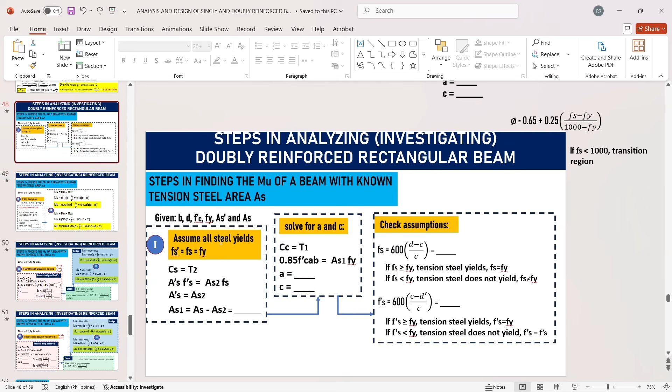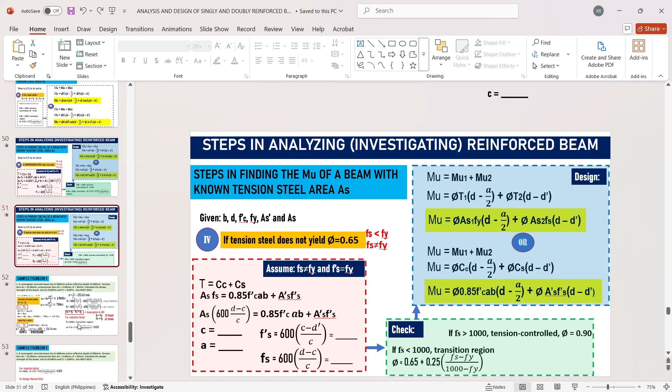Sample number 1. We have a beam with width 400, effective depth 600, tension bars AS with 10-28mm bars. Note the given tension and compression bars. Disclaimer: assume tension is at the bottom, positive moment. D prime is 60, measured from compression fiber down to the centroid of AS prime. Calculate the design strength of the beam using fy=415 and f'c=21 megapascal.

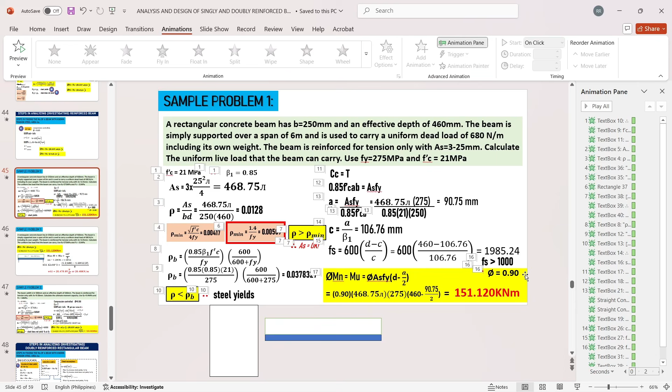So we have this. F prime S is 600 times (C minus D prime) over C. It took me a while to send this because I had to type everything individually. So let's discuss faster. D prime is 60, so we get F prime S equals 457.5.

Next, if we check: Fs is more than Fy, and F prime S is also more than Fy. We're glad our assumption is correct, so we stick with the A and C values we obtained. We don't need to solve for a new C or A. Therefore, I can now proceed to design my MU since all bars are yielding.

For the reduction factor, we get the reduction based on our FS. Even though it yields in tension, it's less than 1,000, so we are in the transition region. That's how it works. Then we substitute the values.

FS, the actual FS is 824. So ito na yung sinasabi ko sa inyo na pag nag-analyze tayo, hindi na 800. Hindi na siya maximum range eh. So, mababago na. So we have 0.825 final reduction.

So if we use that to our design moment, yan, ito yung formula ng design moment, the summation of mu1 plus mu2. So ilagay mo lang yung moment equation ng mu1 and 2. Depende sa'yo kung anong gusto mo, kung tension moment ba o compression moment. Balikan nyo lang yung diagram, no? But this time, ang gagamitin ko muna ay yung tension moment. Okay? So, T1 tsaka T2.

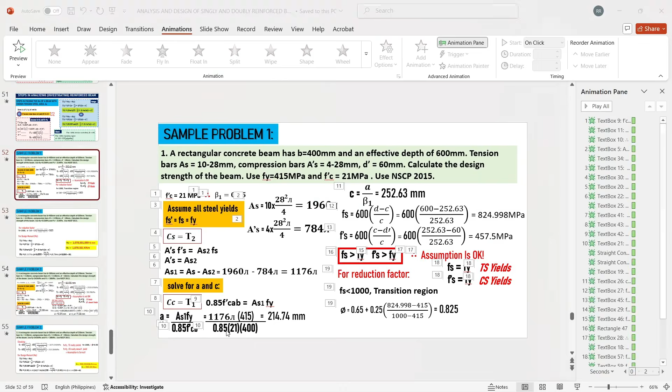May reduction. Tandaan, may reduction. Kasi MU na yan. So, substitute. T1 is AS1FY. Why? Because FS sana yan, kaso FY na nga, kasi nga nag-ano na siya, nag-yield na siya. Tapos 'di ba AS2, sorry for this, meron tong mali. Hindi to F prime S kundi FS kasi T2 yan eh, hindi siya CS, no? Okay, so balik natin. Yan, FS. Pero FY na rin yan kasi nga FS is equal to FY na. Okay? So yun lang, itutukan nyo mabuti yung mga FS natin, ha? Yan, FY na rin to.

Ganun lang yan. Yan. So, kaya pansin nyo, sinubstitute ko na lang yung AS1. Yan, yung nakuha natin kanina. Tapos yung reduction natin no, is 0.825. Tingnan nyo na lang yung pagkakasap. Yan, therefore, we have 1078, 501.089 Newton millimeter, or in kilonewton meter is 1078.501. That's example number 1 for yielding, lahat nag-yield. Parang gano'n. So, anticipate natin yung isa.

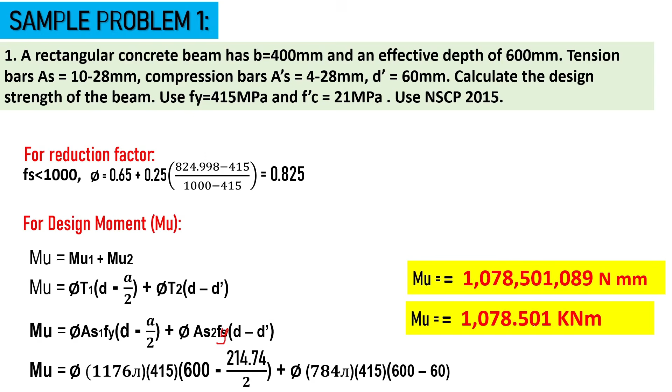Yung problem number 2, malamang may hindi na nag-yield dito. So, binago ko na yung given like yung B is 300, effective depth is 350. So, medyo kwadrado, no? So, tension bars 428, compression bars is 228. Yan, binago na rin yung F prime C. So, okay to. So, next, let's start with the beta 1 again.

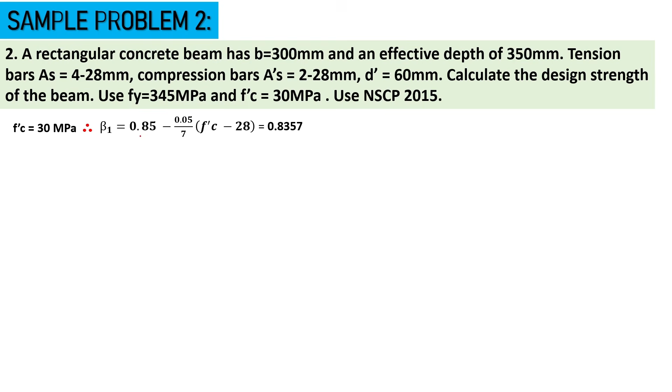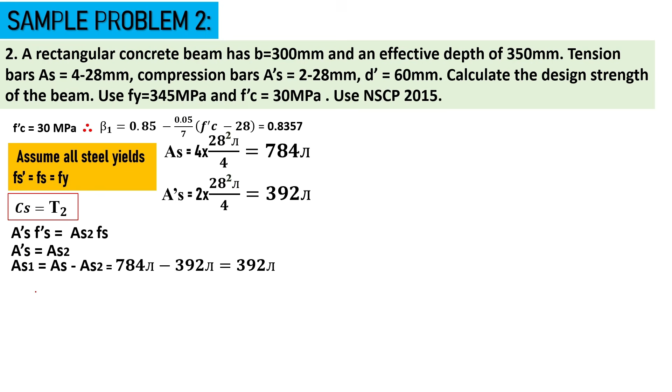Okay, kuha tayo ng bagong beta 1 kasi more than 28 yung F prime C. Then, kuha tayo ng area as usual. Yan, then assume all steel yields, para makakuha tayo ng AS1 at magamit tayo ng AS1 sa pagkuha ng A and C. Ganun lang. So, 392 yung AS1, 392 pi. So, to solve for A, CC and T1 again will equate, and then substitute. We have 55.538 mm. Napakaliit yan.

Okay? So, parang sinasadya na maging ano to, compression steel yield. Does not yield. Okay? So, 0.85, 30 and 300. Okay? And then C. Okay? 66.456. Okay? So, parang pinakargang mabuti doon sa compression bars. Okay? Kaya hindi masyado malaki yung ano mo, yung depth of compression block.

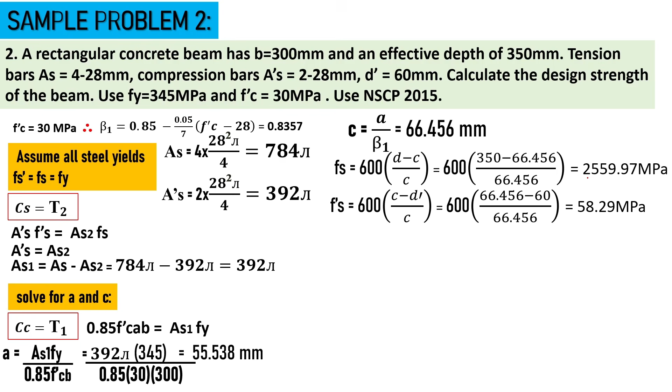Di ba? Maliit eh. So, finally, we have FS to be checked, no? And substitute D, 350, substitute C. Okay? And we have 2,559, a very large number for steel, tension steel. So, this is yielding, more than 1,000 din siya. Tapos, yung F prime S mo, kinawawa. 58.29. Therefore, less than FY. No? So, our FS is okay.

Good assumption. So, nag-yield. Pero yung F prime S hindi nag-yield. Less than siya. So, assumption is not correct. Therefore, you need to get the new A and C. Ganun yun. So, dahil hindi nag-yield si compression, equal lang siya sa sarili niya. So, ang sarili niya ay yung 600 C minus D prime over C. Pero hahanapin niyo po yung bagong C, yung actual C talaga. Hindi ito yung actual niya kasi ito yung A and C nang inasumong nag-yield lahat. Pero dahil hindi, kuha kang bago.

By summing up, T is equals to sum up mo yung CC plus CS, okay? Which is equal to T. Okay? T as a whole, no? So, AS, FS. Okay? FS, walang problema sa FS kasi nag-yield eh. Pero yung F prime S is i-account natin tong actual niya. So, kailangan mo i-substitute yan. Yung CC, sa ulo niya lagi yan, compression force yan eh. 0.85 F prime CAB. Pero si A dito, it will be beta 1 C. Para makakuha ka ng isang unknown lang na C.

Okay? So, substitute na yung values. Yan. So, yung AS mo is the total, 784 pi. Yung FY mo is 345. Okay? And so on and so forth. So, yung ating beta 1, ano yan yun? Okay? So, yeah. Okay? Malinis. So, yung C natin ngayon is 92.375. Para masatisfy natin yung ito.

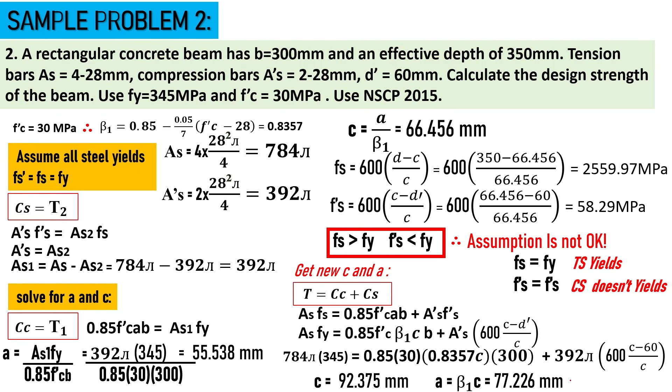So, para kang nagpapanibagong assumption na ito dapat ang mangyari. Parang gano'n. So, si A mo ngayon ay 77 pala. So, ngayon, ang susunod na step dyan is to check again. Okay? Sa bagong C. Okay? So, yan na yung actual FS mo. 1673 pala. Okay? Ano ba yung una natin nakuha? 25, yung pala, 16. Wherein, tama na yung assumption mo. TS really yields kasi more than FY naman talaga siya. So, yun na yung actual mong FS. So, acceptable na ngayon si C.

So, nag more than 1,000. Reduction will be 0.9. While your F prime S is 92 na, no? C, 92 minus 60 over C. So this time, ito na yung actual mo F prime S. Therefore, that is really less than Fy and it really doesn't yield. So assumption is correct na tayo dito.

Ibig sabihin na-found na natin yung dapat na C para masatisfy yung nakita nating condition kanina. Therefore, pwede na tayong mag-solve ng design moment. Hindi na naman to bago. Again, MU1 plus MU2, pero mamimili ka compression moment o tension moment. Pinagsama. So this time, isagot ko yung dalawa para makita nyo kung paano, for the sake of the lesson. Ngayon, try ko muna sa compression moment.

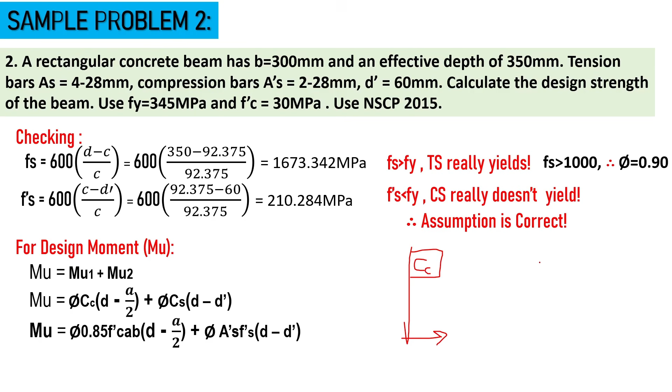Si CC, yung first diagram yun, yung may ganito. So ano to? Ito yung sa C, tapos ito yung sa CS. So pagsamahin ko sila plus, no? Yan yung MU1, MU2 sa compressions muna. So okay, ngayon,

0.85 F prime C AB, CC. CS is A prime S, F prime S. So moment arms are defined. So reduction, 0.9. Okay, ano lang ba ang wala akong ano dyan? Yung A. Ano na bagong value ng A? 77.226 sabi kanina, and yung A dito rin, pansin ninyo yung F prime S.

Hindi siya FY eh, 210 eh. Ayun siya, kasi hindi nga nag-yield. F less than FY siya. So dapat ang gagamitan mo, F prime S pa rin, yung sarili niya, unless it's greater than FY. So yeah, finally, we have 233.155 kilonewton meter.

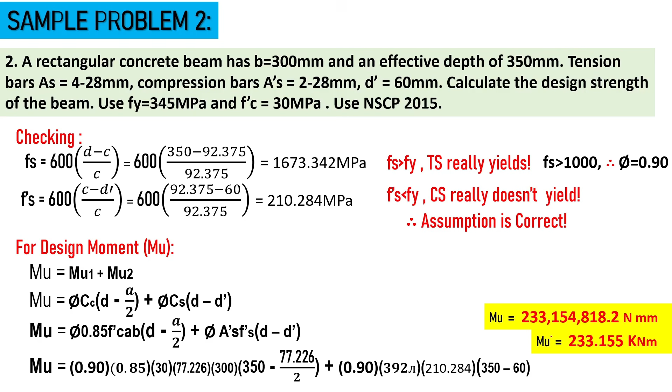So yeah, and as I said, natin sa tension naman. So pag nawili tayo sa tension talaga, tension moment, sabay-sabay naman tayo nung umpisa pa lang, nagte-tension na tayo, di ba? Meron nga lang konting kompromiso dahil ang T1, pinagsamang T1 at T2 is relying on AS1 at saka AS2. Pero pareha silang FS actually. Okay, but sabi natin kanina sa tension steel really yield.

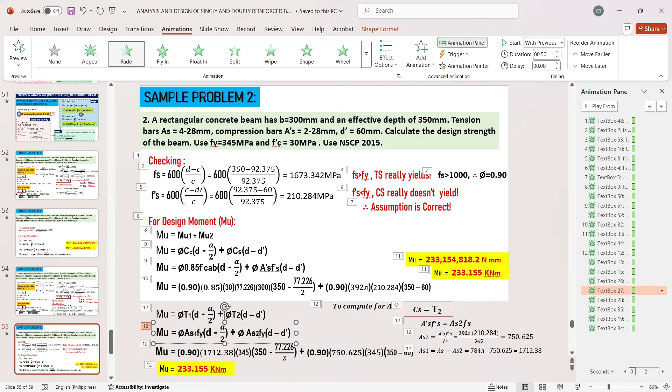So nagiging FY lang siya. Pati dito sa kabila. Nag-yield naman parehas eh. Ang tanong, ano ngayon yung AS1 mo at saka AS2? So bago mo gawin to, kapag talagang tension moment ang gagawin mo, kumuha ka naman ng bagong AS1 at AS2 mo. Nabago sila yan kasi hindi nga equal si F prime S and FS eh. Hindi sila equal, no? Therefore, to compute for AS1, okay, and 2, so makukuha mo yun sa relationship nilang dalawa.

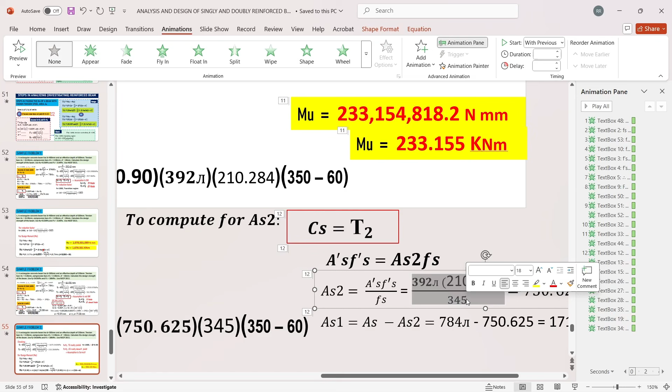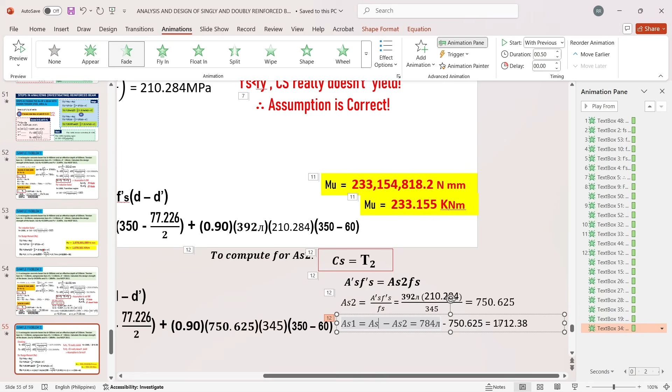Pero yung Fs mo ay already at 345. Bakit? Kasi greater than Fy, hindi pwedeng sumagad sa Fy. So gamitin mo ang 345. Okay, ganun lang yun, pero pag less than siya, gamitin mo yung sarili niya. Ganun, so finally, we have 750.625. Ngayon, para makuha mo yung bagong AS1, i-minus mo siya sa AS, yung AS2. And we have 1712.38, yan ang isasalpak mo ngayon dito sa AS1 tsaka AS2.

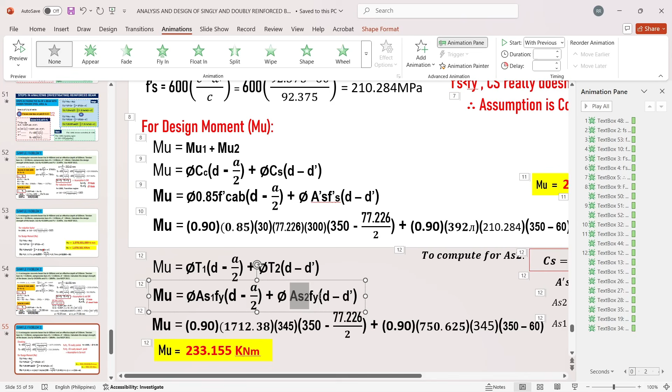Pero yung mga FS mo, FY yun, walang problema doon. So kaya, makukuha mong parehas ang sagot, 233.155. Okay, either sa kanilang dalawa, pwede mong gamitin. So medyo matrabaho lang yung sa tension part. So nakita nyo na ngayon na meron palang advantages and disadvantages yung compression tsaka tension moments.

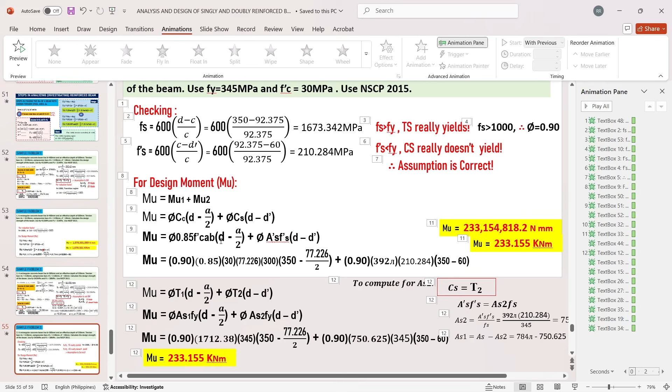Ayos na ako dyan, so last problem. We have rectangular beam. Dito naman bias na to sigurado. Okay, kitang-kita nyo na, kasi tinamad na ako mag-FX. Okay, so DL pa ko na, no? Medyo ano na tayo, no? Gawin na sa oras, kaka-record lang ngayong araw na to. Okay yan, so 4:27 na.

So ito po yung solution. Wala din naman halos pinag-iba sa mga simula. Kung mapapansin nyo, sa bagong given, 320 na siya, effective na 580. Yung bars, ayan, FY 415, F prime C 21. So we have here the computations again. So ginol lang natin dito is to get A. So ito siya.

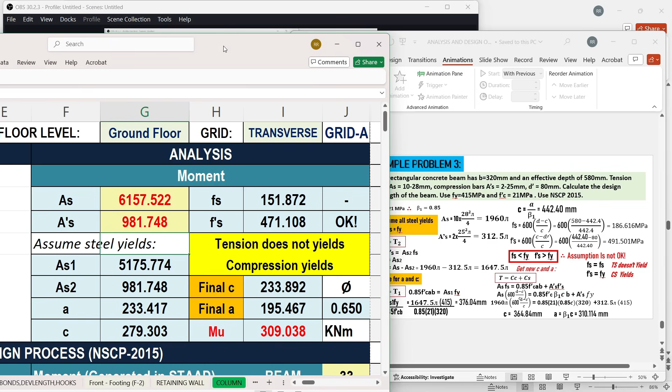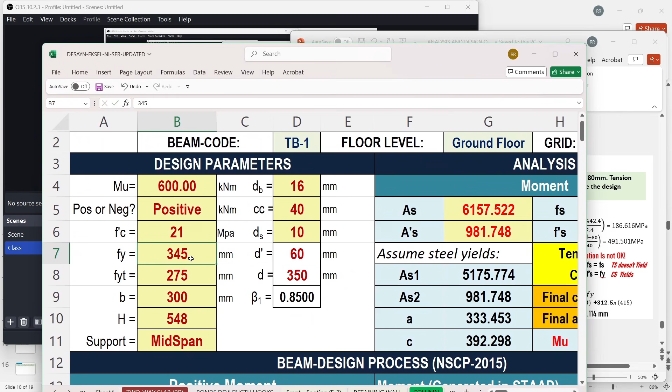Okay, so the A prime S is 312.5 pi. The details are here on the other side. F prime C is 21, Fy is 415, B is 320, and effective depth is 580. It automatically computes beta 1 here.

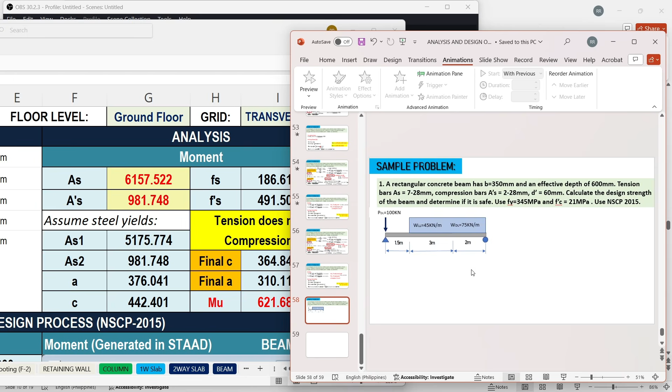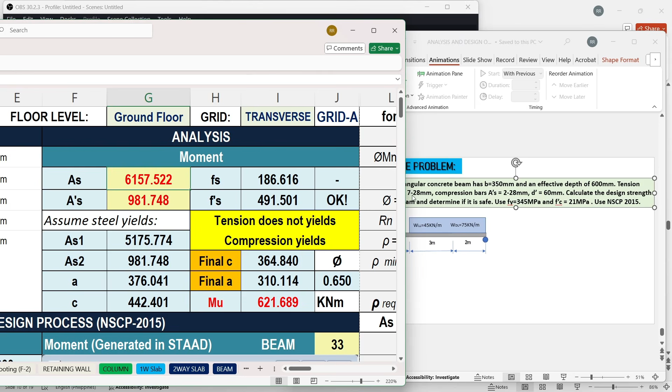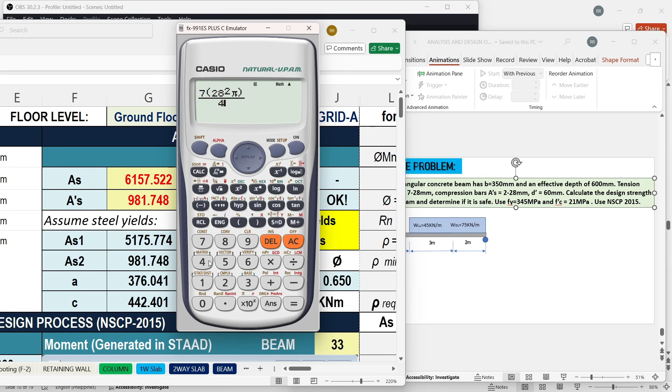7, 28. So 7, 28 squared over 4. That gives 1372π. 7, 28 squared, okay, 1372π.

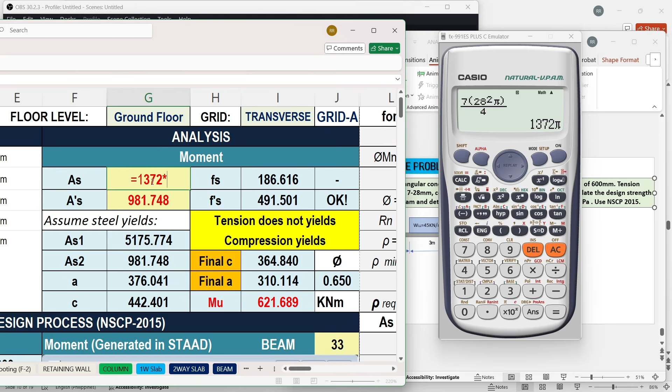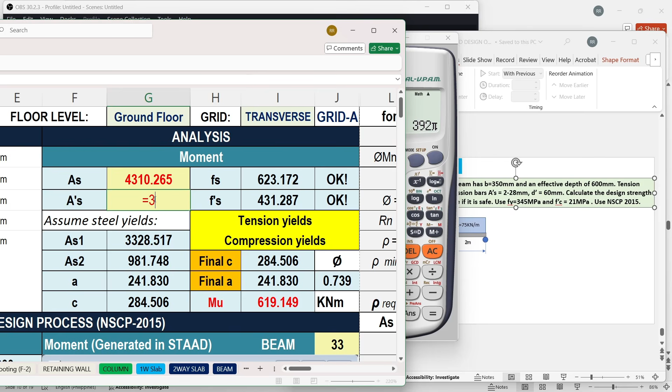Then my A prime S is 228, giving 392π. Then my F prime C is still 21. Fy is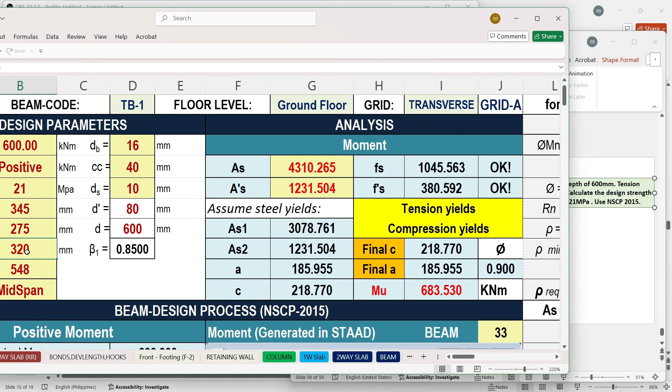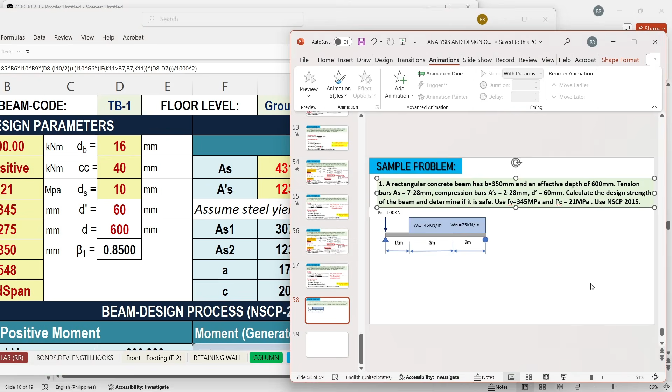345 now. Then 600 is the effective depth. B, the beam is 350 mm. Then our D prime is 60. So as shown here, both yielded, condition number 1. So we're the same for C and A here as in the first computation. So finally, we have 698.796.

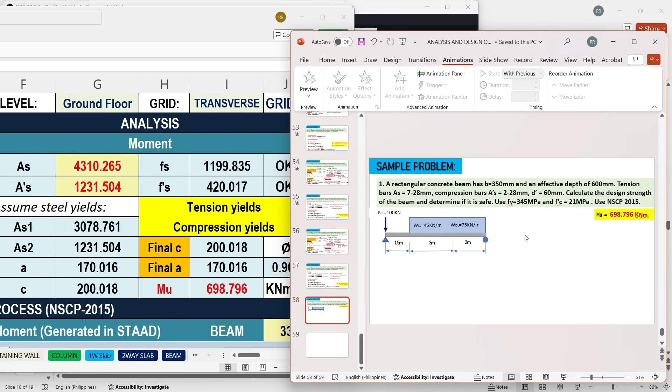So for the MU here, I want you to solve that manually so you get used to it without just looking at the formula. So, 698.796 kilonewton meter. That's our goal.

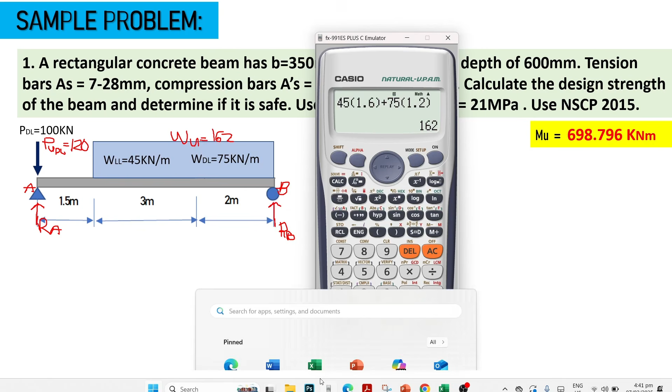So now, to get the reaction from A, let's take moments at B. But let me get the total first. The total there passes through the center. So how do we get that? That is 162 times 5, the span of the uniform load, giving 810. Okay, coinciding with the center of the uniform load, that's dropping on half of the 5 meter length, so that's 2.5.

So now we can take moments at B. That is 810, taking moments at B, clockwise direction is positive. I'll take RA first, call it X, its moment arm is 5 plus 1.5, 6.5. Equals, since all are counter, the 810 is counter already, so it goes to the other side. So that is 810 times 2.5.

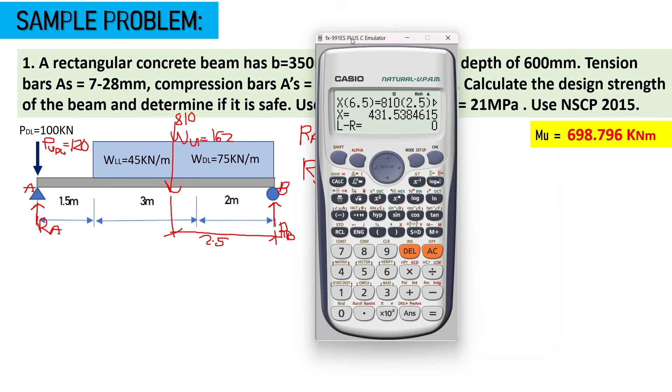431.538. Ngayon, si RB naman. Yan, mabilis dapat mag-moment, mabilis dapat mag-reaction.

Yung mga theory people, to get the B reaction, i-minus na lang natin siya sa mga Y's. 810 yung pababa, tsaka yung 120. I-minus na lang natin yung RA. Sabi nga nasa X daw yun. So, 498.461.

Tama ba? 498.462 pala. Yan, so that is in kilonewton. Mabibigat din, ano?

Almost mabibigat din. So ang gagawin mo dyan, para ma-ensure mo kung tama yung reaction mo, mag-moment ka naman sa A, baka kasi dadali tayo, baka magkamali pala. Kapag nag-shear diagram ka, dapat masiro siya sa dulo, ganun.

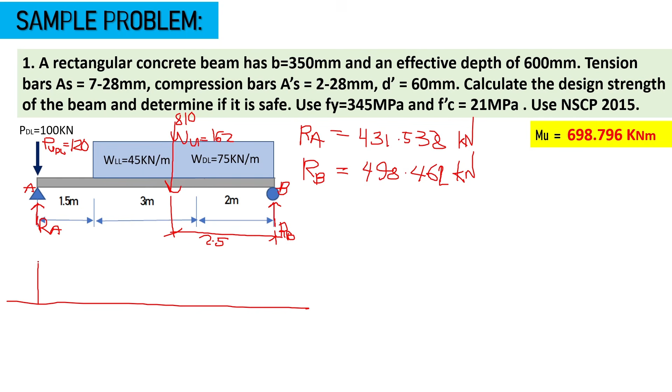Mag-shear muna ako. Angat ng 431, tapos baba ulit kasi may 120. So parang nangyari, nagkokontrahan silang dalawa, pero lamang pa rin si RA.

So ang gagawin natin, i-minus na natin yung 120. 431.538 minus 120, so 311 lang to. Okay? 311 lang yan, 0.538.

Tapos walang load ito, so yung A to yung 1.5 lane, walang load, so straight line lang. Then may load na tayo, uniform load. I-minus mo yung value ng 810, so that would be 311.538 minus 810.

Dapat yan, negative 498. So ito nga yun. Negative 498, and this is linear, first degree. Yan, negative

498.462, yan ang kanyang shear diagram, wherein yung zero nandito sa gitna nung uniform load. Madali lang siya sa ngayon. Anyway, so this is the shear diagram, and this will give you the max moment.

Yung zero shear dito, so actually pwede mo na kunin yung ano dyan, moment diagram niya. In the moment diagram that will give you a positive value, and the moment that will give you the highest value ng moment is this area. By concept ng Mech 3, Mech 1.

So area daw ng load is shear, and area of the shear is the moment. Ito yun eh, ito yung magbibigay sa atin ng moment. Ganun lang, kahit hindi mo na drawing, ang goal mo lang naman is to get the max moment eh.

So yung area ng square, ng rectangle, 311.538 times 1.5, yan yung area ng rectangle pa lang na to. Tapos plus the area of the triangle here.

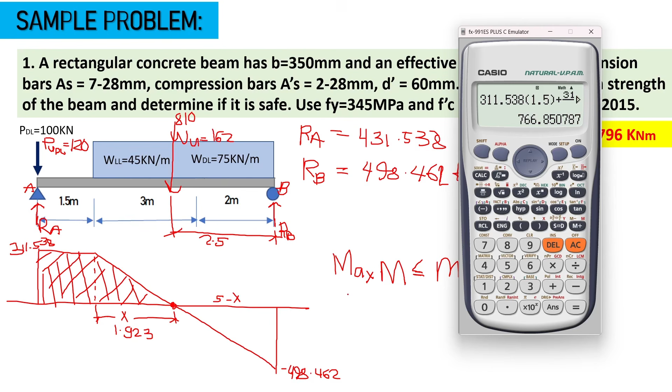311.538 times 1.923 all over 2, triangle eh. Okay, so 766, that's the max moment, 766.85

And pag investigation, ang hirap mag-trial and error, hindi mo alam kung saan ka mag-adjust. So kaya meron tayong ganito sana, Excel, kasi dito mabilis ka lang magpalit-palit, yan na, makukuha mo na siya.

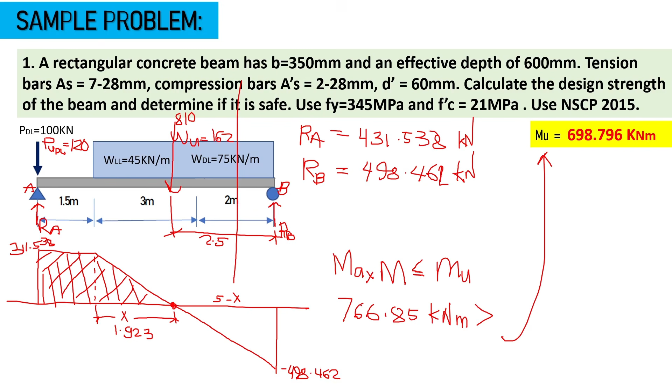Yung mag-cut ka dito, then find the moment equation for the whole, and we'll get the maximum moment, derivative mo lang yun, and so on and so forth. Okay, so palagay ko sapat na ako dito. Kaya feeling ko, mag-aaral ka mabuti. So sige.